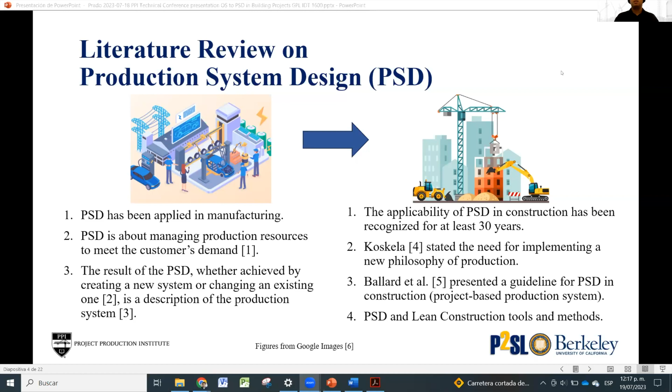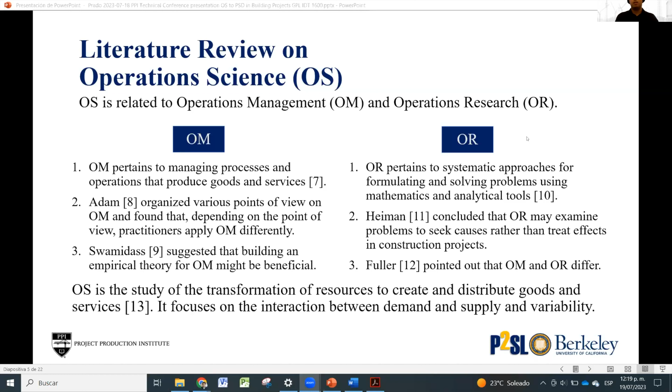Then, having these two major components of literature review, which are the basis for developing this research project, these are the research questions we will try to answer. How can an operation science analysis be beneficial for production system design on a construction project, and what are the assumptions that we have to make in order to conduct this type of analysis?

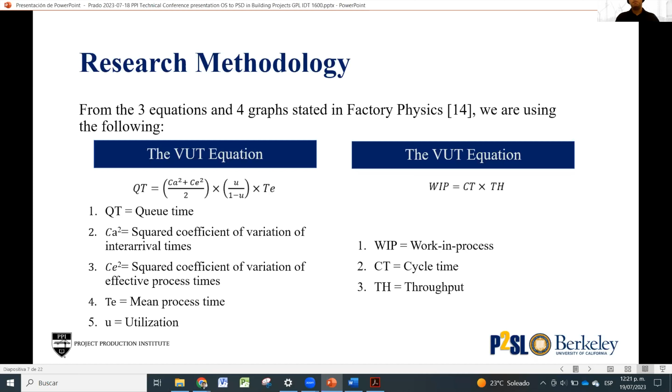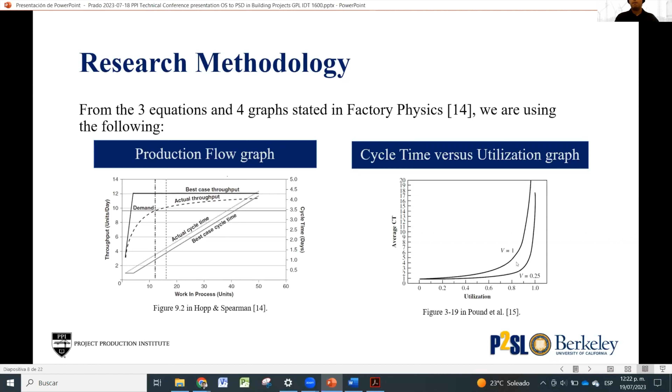Then we're going to use these two graphs. The first is a production flow graph, already explained by several presentations earlier today, showing how throughput, work in process, and cycle time are related. Many of these lines are based on the Little's law equation from the previous slide. The second is the cycle time versus utilization graph, which describes how the average cycle time and the utilization are related, and how variability might impact the relationship between these two parameters.

Now going into the case study, here we have the specific steps that we developed. Most of this part of the presentation was already shared during the symposium last year, but it's very important to acknowledge this third step that makes several assumptions about how we are going to make this operation science analysis within designing a production system. We are going to explain how we selected a production system, what are the beginning and the end of the production system, and how we mapped, analyzed, and modeled it.

Then we're going to explain these assumptions, which are very important to acknowledge, and how we can provide assumptions that are realistic to what is happening in the current construction process. And finally, we're going to provide some results in terms of the operation science metrics that we presented at the beginning. First of all, the production system.

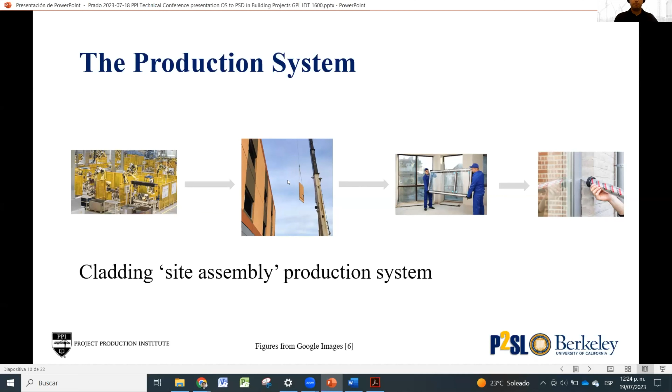among these components. We have to mention that the actual demand that we were working with was the installation of 16 EIFS panels per day. These were engineered-to-order components, meaning that each of these components was designed and engineered so that each of them has a particular position within the elevation of the building.

As I mentioned in the selection of the production system, we are only going to focus on what's happening on the production side, the construction side, meaning that we are going to consider the arrival of each of these components on the construction site, but that's our starting point. So within these constraints of the production system, we are going to use the analytics of Production Optimizer to develop

this operation science analysis. In order to collect data, we had to translate a lot of the conventional project management data, such as the schedule of the project, how many people were involved in each construction crew, how many pieces of equipment they were using, and translate that data into production parameters, such as transfer batch, process batch, and demand. That was the case with the items. These items were the components that were flowing throughout this production map.

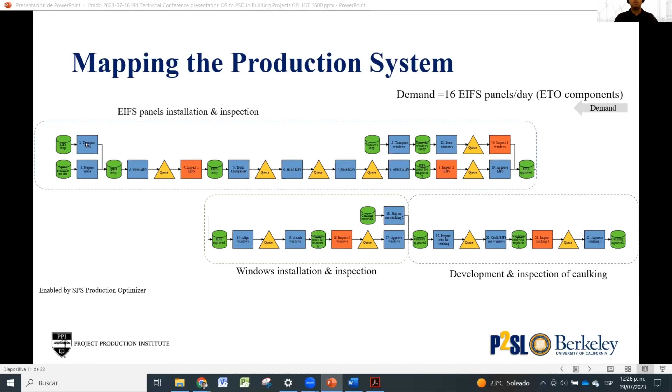As you can see here, in each of these stocks, we are going to see a transformation between these two components, these two items that were going through the same process, and then they are creating a new item. These squares represent this transformation process. So these are the items with the respective parameters and the demand. I have to also mention that this demand of 16 EIFS panels per day was what allowed us to do an equivalent of the demand of the other items that were selected throughout the production system.

Similarly, we collected data about the process rate and the process time of each of the construction crews or the resources involved in the actual operation, and how they developed each of the activities in this production system. So again, translating this information from project management tools such as the schedule or this Gantt chart into actual production parameters was critical, because depending on the accuracy of this translation, we would have either a good result or a bad result. And a good result means that it actually reflects what is happening in the real project.

And in order to develop these translations, we focused on the five levers of project production management based on the operation science foundation, to take into consideration not only the numbers from these parameters, but actually collect this variability and make some assumptions about it. And this is actually the next topic: what are the assumptions that we had to make in order to conduct this operation science analysis? I also want to mention that we used the analytical model component of the Production Optimizer in order to have these optimal results for the operation science metrics.

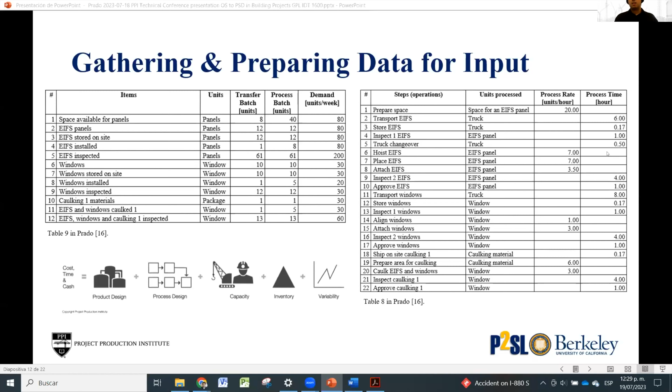One big assumption was a parameter called the squared coefficient of variation, which basically assumed that, if the process rate and the process time are normally distributed parameters, then the square of the coefficient of variation is a relatively accurate metric of the variability of those parameters, meaning that each of the parameters I'm showing in these two tables has a normal distribution, and therefore the square of the coefficient of variation can be used as a measurement of their variability.

We also assumed that there was no warm-up phase in this process, and that was assumed because the project team, in this case, developed a lot of coordination processes that allowed them to avoid having this warm-up phase. Therefore, we can assume that happened in this case study. Then the Production Optimizer, which is the software that we used, accounted for wait time in the analytical model that we developed there, but we didn't consider any matching problem.

That's a big assumption that we made for this analytical model, and we didn't consider rework within this case study. And finally, the current activities of our production system were developed serially. There was no preemption of activities. So this is actually based on the information that we collected from the project team as well.

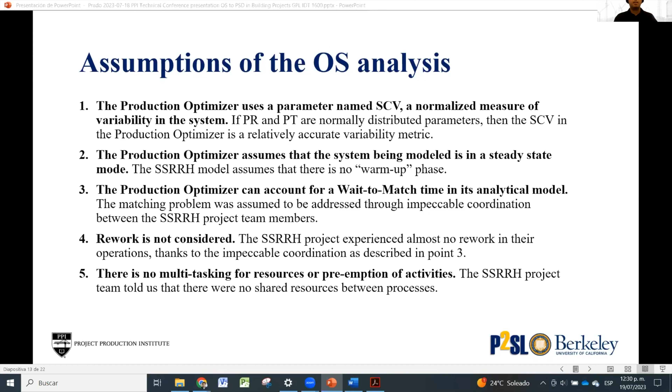So considering these 5 assumptions, the data that we collected and the production map, we have these results with the current demand with 16 EIFS panels per day to be installed. We can see some of the similar graphs that were shown in the previous presentations today. And we see that we have our current demand, which is lower than the best throughput, considering these parameters. And in this case, we are seeing the Little's Law equation graphs, the production model graph, based on the EIFS panels installation, considering these 16 panels that are supposed to be installed per day.

In the graph on the right, we are also seeing the capacity utilization in terms of percentage of each of the resources that are developing these activities. In this case, we can see that for EIFS panels installation, we have a relatively accurate measurement in terms of the capacity utilization. In this case, it was around 82%. And based on the previous presentations, this is below 85%, which allows us to have relatively stable measurements and will allow us to not have cycle times go too high.

We can also see that the most critical resource in terms of capacity utilization is the windows installation. In this case, it is a little bit more than 82% as well. Based on these numbers, we can see that our cycle times are relatively okay in terms of the expected outcome of this production system, meaning that the actual demand was actually met. The current production system is actually meeting the intended demand of 16 panels per day.

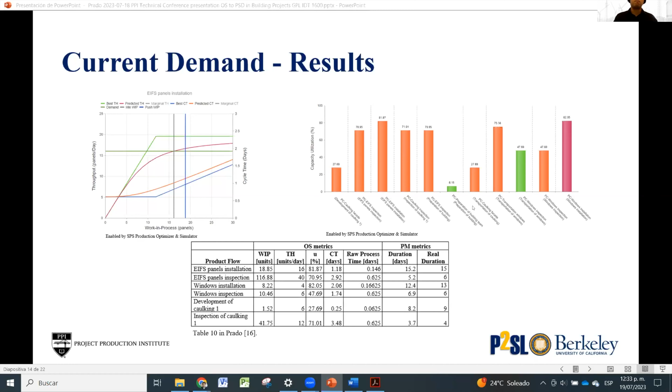Some discussion that we can make about these results is that these four metrics, the equations and graphs, are allowing us to understand the behavior of the production system using operation science. This is very impactful because we can make some contrast between what we can accomplish in the production system and how it might impact the project management role, such as the duration of the activities and the cost of these activities.

Then these 5 assumptions that we made were taking into account the peculiarities of a construction production system, such as the lack of awareness of operation science metrics in most construction projects. Then there is a lack of understanding of the impact of variability and the excessive amount of work in process activities within most construction projects. And there is a lack of ability to stabilize work plans. And the last peculiarity of construction projects is that the steady state assumption may not always be applicable for all these construction processes.

Finally, we have to acknowledge that the operation science analysis presented was developed based on stochastic models, and the results are not always so obvious to most of us. But when we make reasonable assumptions, and we work with a project team that will allow us to make those realistic assumptions, we can actually have results that show what already happened, as we demonstrated here in this chart. These results are pretty similar to each other. Therefore, our model was providing good results to make decisions.

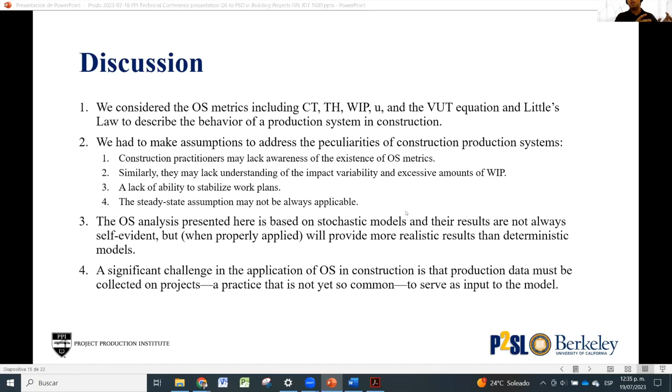And as I mentioned at the beginning, a significant challenge of applying or implementing operation science in construction is how to collect data. And production data is not so obvious in construction sites or in general in any project. So we have to establish ways to translate these project management documents or tools and how to translate this data into production parameters.

As a conclusion of the whole research project, we actually answered those initial questions. Operation science is applicable by making the right assumptions and acknowledging the existence of a project-based production system, meaning that we will have a temporary production system and we have to study it in a very specific way, using the context as the baseline.

The software that we use provided by SPS, the production optimizer, actually provided the means to use this operation science analysis, and by using the analytical model, we were able to conduct this case study, which provided these results, and therefore made possible the applicability of operation science to design production systems within a construction project.

These production parameters can be translated by using the right assumptions and collecting the right amount of data from the project team and from the project plans and project tools. Regarding the operation science metrics specifically, we can say that the cycle time stands out as it's a consequence of what happened with the work in process and the throughput metrics that are happening within this production system. And cycle time actually will directly affect project performance in terms of the duration of that specific construction process that we are analyzing.

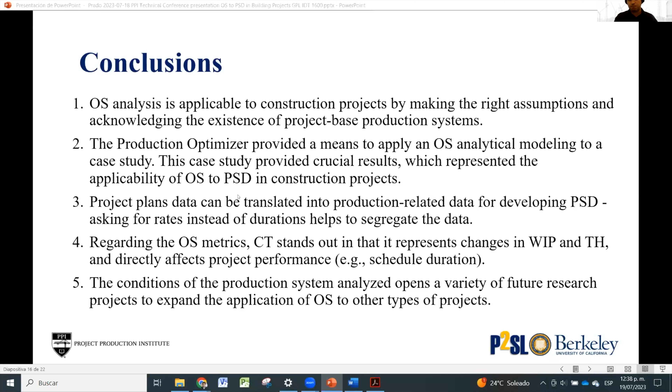If we try to apply this operation science analysis into a different type of project, a more traditional type of project, we might find different types of difficulties in order to collect data. And that can lead us to develop different types of research projects. I believe that I have some extra results, but I can talk about that if we have some more time.